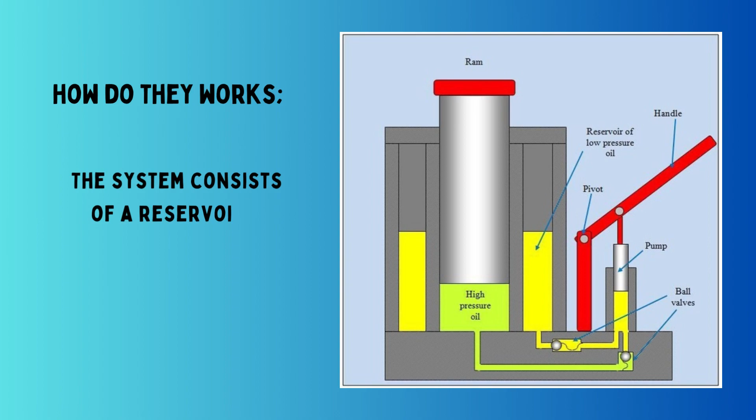How do hydraulics work? Hydraulic systems work by using a liquid, usually oil, to transmit power. The system consists of the reservoir, pump, valve, cylinder, and piston.

The pump draws oil from the reservoir and pushes it through the valve, which controls the flow of oil into the cylinder. The piston in the cylinder is then pushed by the oil, creating force or movement. The oil is returned to the reservoir to start the process again.

This system is used in many applications, including heavy machinery, airplanes, and automobiles. This picture that I found while searching is the hydraulic jack.

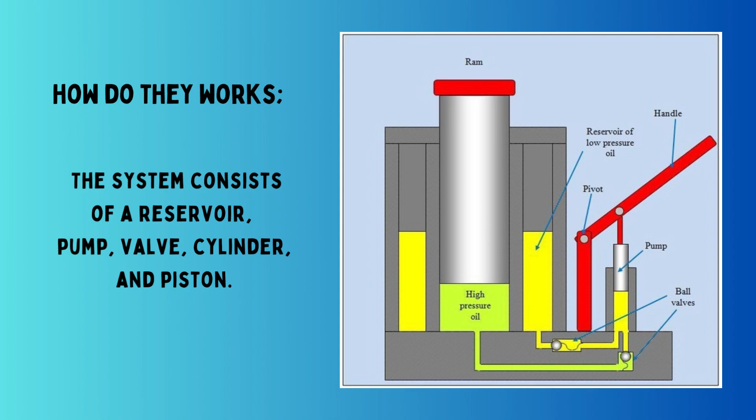The importance of the hydraulic system is crucial in various industries, including aviation, construction, and manufacturing. It uses fluid to generate power, which is used to operate machinery and other equipment.

This system provides high power density, reliability, and precision. It also allows for smooth and efficient operation, reducing wear and tear on the equipment. Without the hydraulic system, many industries would not be able to function efficiently and safely.

The hydraulic system consists of various valves and components that work together to transfer energy through a fluid. These components include pumps, cylinders, motors, and filters. The valves control the flow of the fluid and the direction of energy transfer.

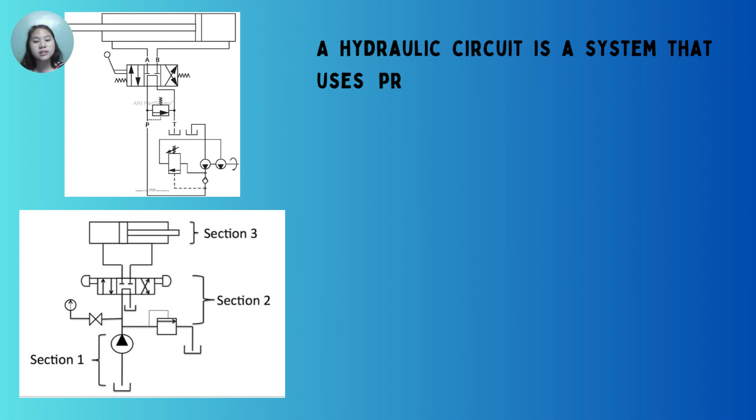First is the hydraulic circuit, a system that uses the pressure of the fluid to transfer power. It is composed of the pump, reservoir, valves, actuators, and hydraulic fluid.

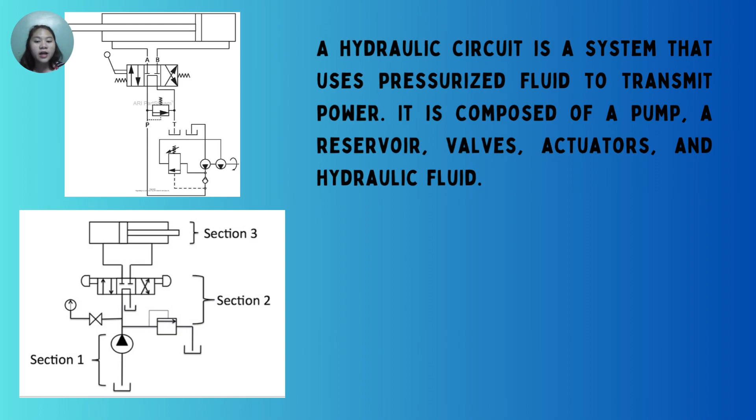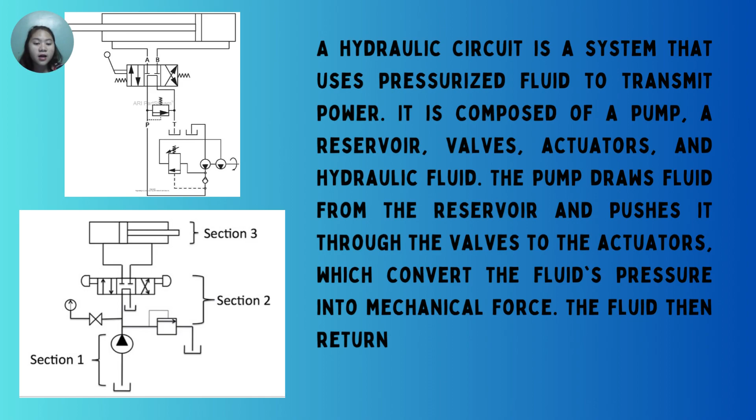The pump draws fluid from the reservoir and pushes it through the valves and the actuator, which converts fluid pressure into mechanical force, and the fluid then returns to the reservoir to complete the circuit.

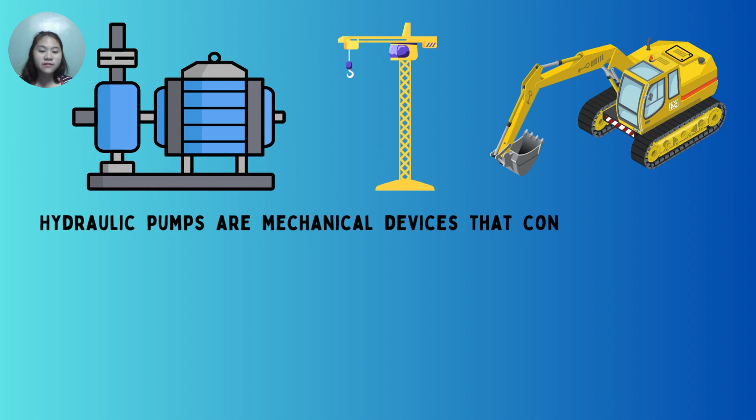Hydraulic pumps are mechanical devices that convert mechanical power into hydraulic energy. They work by using a piston or gear to create pressure in fluid, typically oil or water, which is then used to power other hydraulic equipment.

The pump draws fluid into its chamber where it compresses it and forces it through the outlet.

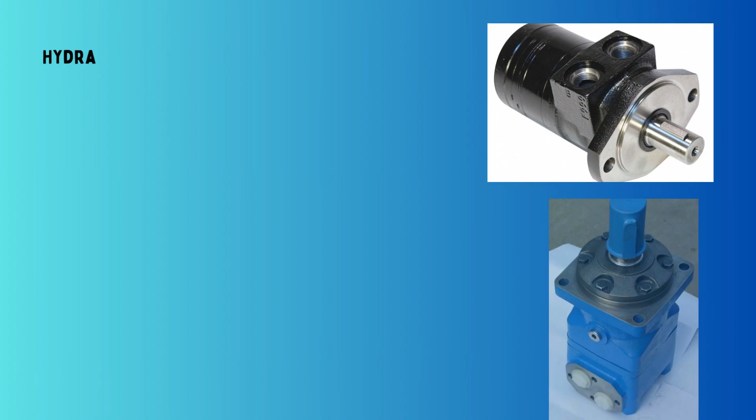Hydraulic motors are mechanical devices that convert hydraulic pressure and flow into torque and rotation. They work by receiving pressurized fluid from the hydraulic pump and directing it to a set of hydraulic cylinders, which in turn rotate a shaft.

The rotation of the shaft is then transferred to a mechanical system, such as a gearbox or a wheel. The amount of torque generated by the hydraulic motor is directly proportional to the amount of fluid pressure and flow supplied to it.

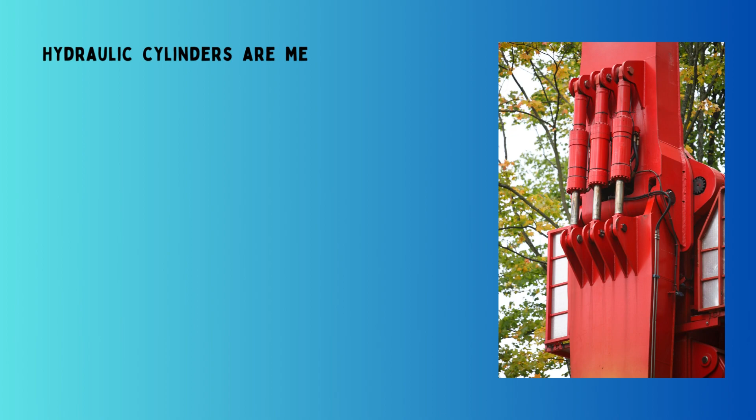Lastly, hydraulic cylinders are mechanical devices that use pressurized fluid to produce linear force and motion. They work by converting energy from the fluid into mechanical force that moves a piston within the cylinder. The fluid, typically oil or water, is stored in a reservoir until needed.

When the cylinder is activated, the fluid is pumped into the cylinder, which causes the piston to move. The force and speed of the piston can be controlled by adjusting the pressure and flow rate of the fluid.

There are several risks associated with inadequate safety training in the hydraulic system. First, improper training can lead to serious injury or even fatality due to the high pressure and force involved in the hydraulic system.

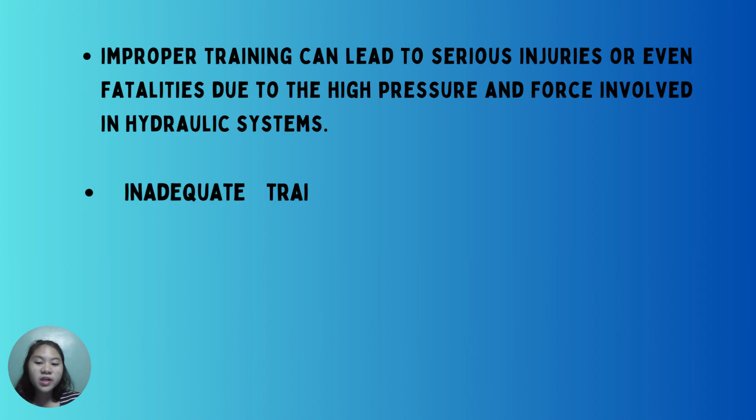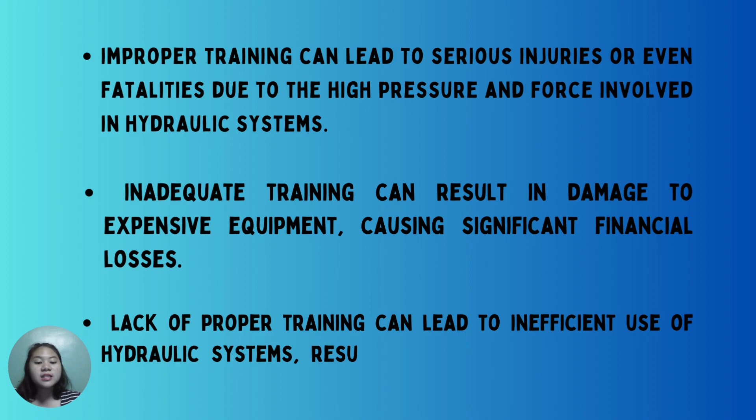Second, inadequate training can result in damage to expensive equipment, causing significant financial losses. Lastly, lack of proper training can lead to inefficient use of the hydraulic system, resulting in decreased productivity and increased downtime.

Now for the advantages and disadvantages of the hydraulic system. First, the advantages: since there are many, first is that they are easy to control, accurate, and simpler. Also, they are easy to maintain.

One of the main advantages is their ability to generate high power with relatively low input. This makes them ideal for heavy machinery and equipment.

Additionally, hydraulic systems are highly reliable and require minimal maintenance. They also have a long lifespan and can withstand harsh environments.

For the disadvantages, one of the main drawbacks is their potential for leaks, which can lead to loss of hydraulic fluid and decreased performance.

Another disadvantage is the complexity of the system, which can make repairs and maintenance more difficult and time-consuming. Also, once the oil leaks, there are slippery surfaces and increased accident risks.

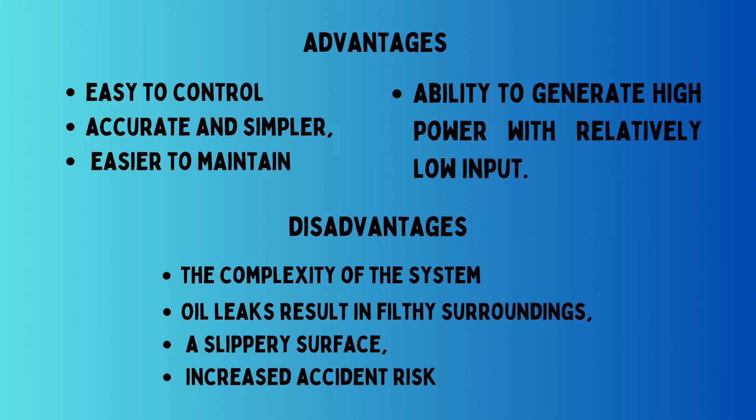In conclusion, hydraulic systems are widely used in various industries due to their efficiency and reliability. They work by transmitting force through a liquid, which allows for precise control and smooth operation.

Hydraulic systems are commonly found in heavy machinery, aircraft, and even amusement park rides. With proper maintenance and care, hydraulic systems can provide years of dependable service.